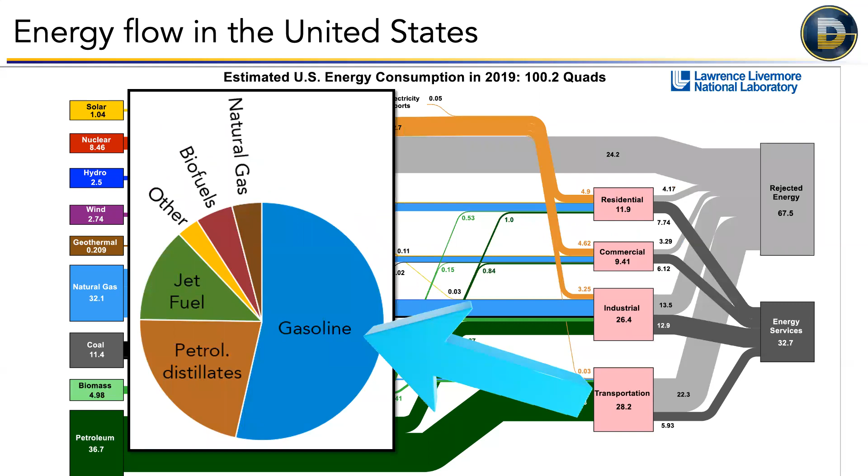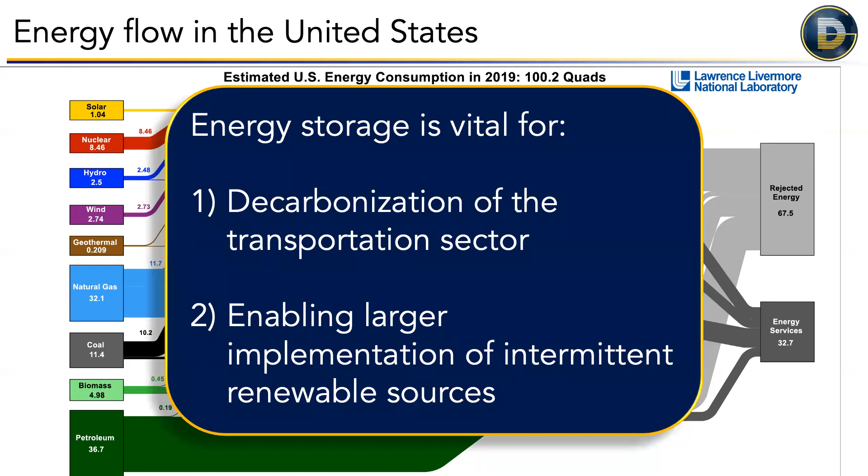Secondly, in addition to electricity, we have to replace the fuels we burn for transportation. We like gasoline and diesel fuel because they're very dense forms of energy that can be used on demand. So if we're going to replace that, we need something that is also energy dense and can be used on demand. So to wrap up, energy storage is really vital for two things as I see it: one, decarbonization of the transportation sector, and two, enabling widespread implementation of these intermittent renewable sources.

So what are our choices here? As I see it, we have three. One being hydrogen fuel cell electric vehicles, where we're basically doing a cold combustion process, combining hydrogen gas with oxygen gas to form water - so the emissions are great, just water and electricity. The second option would be battery electric vehicles, which will be the focus of most of this talk. The third option would be bio-derived fuels or biofuels, which would be the option of growing a plant or algae that uptakes CO2, processing it in some way to make a combustible fuel, and then burning it. That can be made quasi-carbon neutral because the CO2 emissions were uptaken at the beginning.

The problem is the current technology has a relatively low energy return on investment. The amount of energy you have to put in to cultivate the crops, harvest them, and process them is almost as much as you get at the end. So the return on investment is not that high.

There are alternatives out there that are better, but they're not ready for large scale yet. There's also land use implications with biofuels, notably that if we're using land to grow crops for energy, that's land that could be used to grow crops for food, which has social justice implications, and it could also drive deforestation. So in my opinion, while biofuels probably do have a role, they're better suited to applications that are more difficult to electrify via other options, such as aviation.

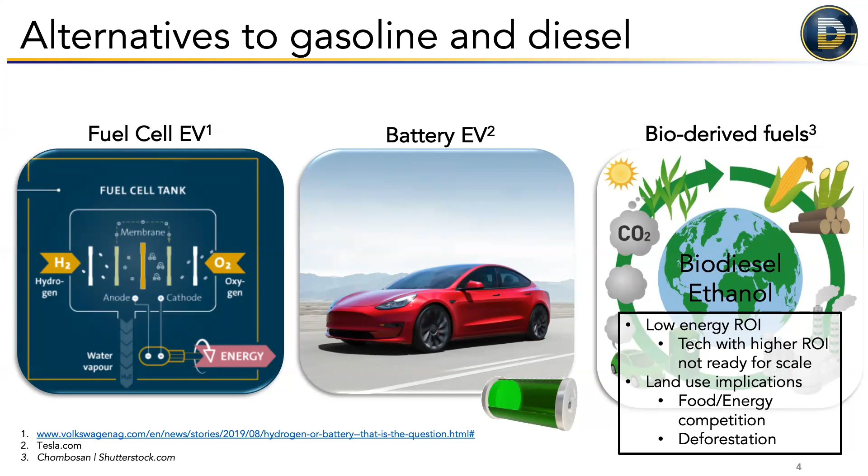So we're down to two options, battery electric or hydrogen fuel cells. Let's look at the energy flow for these two technologies. For battery electric, we have energy from the grid. We have to transport it and get it to where you charge a battery, which has some inherent losses - it might be around 80% efficient. The actual end use, charging and discharging the battery to drive an electric engine, is extremely efficient - it can be over 90% efficient. In contrast, an internal combustion engine might be only 20% efficient at the same process. So battery electrics have a big plus there.

In contrast, hydrogen fuel cells - hydrogen is not a fuel we can just go mine. You either use electricity to split water and make hydrogen, or use high temperatures to split hydrogen off methane, but that's not a low carbon option. So we'll assume you're starting with the same electricity, preferably from wind or solar, and you make the hydrogen with electrolysis, compress it, transport it, and then run your fuel cell to generate electricity. At the end you need a battery again because it's not practical to have a fuel cell big enough to accelerate a vehicle quickly. There's losses at every stage along the way, so the overall efficiency for a hydrogen fuel cell is only about 30%, maybe not even that high.

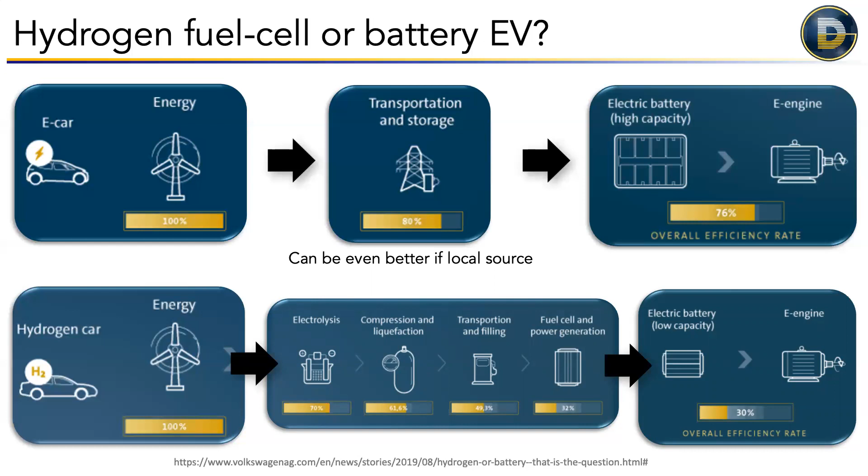What this means in the end is that if we wanted a hydrogen-based economy, we'd need more than twice as many wind and solar farms to supply the electricity, which really doesn't seem to make a lot of sense. For that reason, battery electric vehicles really are the most promising means to reduce the carbon intensity of the transportation sector, which is responsible for nearly 30% of overall greenhouse gas emissions in the world.

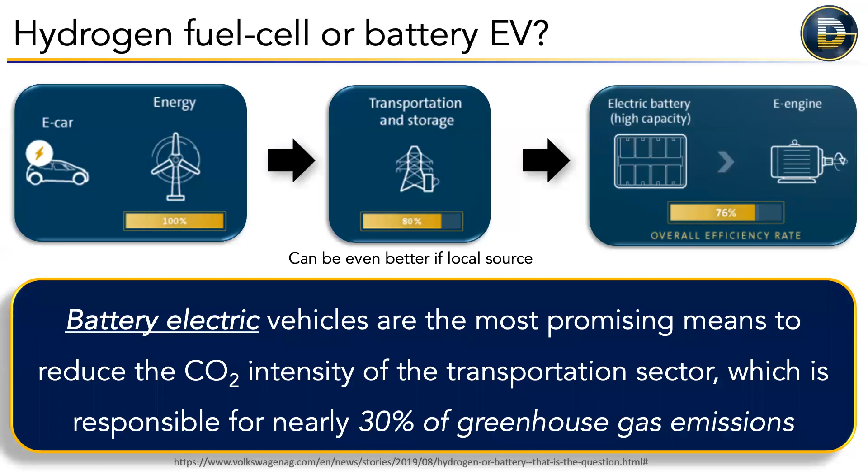Now, what about grid storage? I mentioned at the beginning there's two big things - transportation and enabling renewables on the grid - which aren't isolated, you need both. But for grid storage currently, we only have about 2% of the total generating capacity worldwide, and it's about the same in the United States. Above 95% of that storage capacity is pumped storage hydro - basically when you have surplus energy, you pump water up a hill, and when you need more energy than you're producing, you let the water flow back down and produce electricity from the standard hydroelectric pathway.

The problem with this is that it's geographically constrained. You have to have a body of water at the bottom and top of a relatively large hill, and it has to be close to a population center so you don't have to transport the energy too far. Because of this, we've saturated most of the good places to do this, and it's seen pretty limited growth in the last two decades plus.

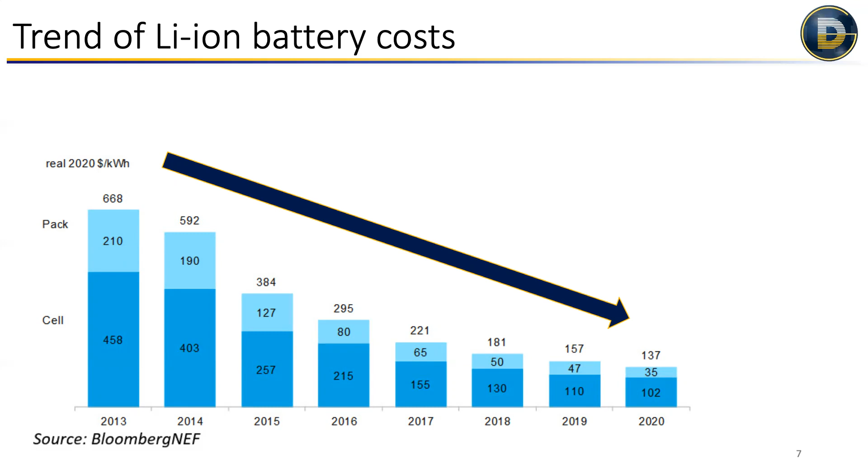There are other options for grid storage, but currently lithium-ion batteries are the leading option. Since they're also the leading option for electric vehicles, and EVs dominate the demand, they will dictate the progress in technology and the cost coming down. So they're coupled together. Beyond that, old technologies no longer good enough for EVs will become the low-cost option for grid storage, and batteries can have a second life.

For an electric vehicle application, you might call your battery not good enough anymore if you can only drive 80% as far as when the car was new. But for grid storage applications, if you can buy the battery for half the cost, that still makes sense, and you can more carefully control the charging and discharging rate. So these things go together, and that's why I'm going to spend most of the rest of the time talking just about electric vehicles, since they're coupled.

So I hope so far I've convinced you why we care about batteries. Does anyone have any questions?

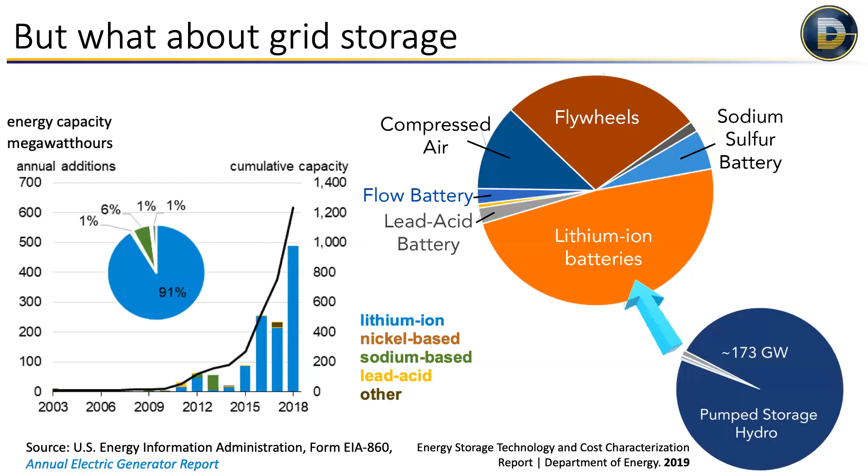Eric: I'm just curious, you mentioned pumped hydro - there are other gravity-based solutions. I've seen things using train tracks and lifting weights, using mine shafts and lifting elevator type systems. Have you looked into whether those have gotten much traction? Speaker: So those would fall into mechanical-based storage, or like you said, gravity.

There definitely are - flywheels are a related technology. That's basically where you get a very heavy disc and spin it really fast in a vacuum so there's low friction. You use magnets to levitate it like a maglev train.

Each has its own role to play because they have different properties. Pumped storage hydro has been the dominant one because it's really cheap if you have the right place to do it, and you can discharge for a very long time if you have a very large reservoir. Whereas lithium-ion batteries, at least now, are more economically viable for short discharge times - used more for load leveling, frequency regulation, rather than filling in the whole trough of a nighttime lull in production.

I don't know the specifics of what breakdown in the last couple years those gravity methods have had, but I do know lithium-ion and other types of batteries - I shouldn't neglect that there are some really exciting new flow battery systems where you can decouple the energy and power requirements, and they can be made very low cost because you don't care about how much it weighs. So there are lots of other options, but in the past few years lithium-ion batteries, because of the economics, have really started to dominate this space.

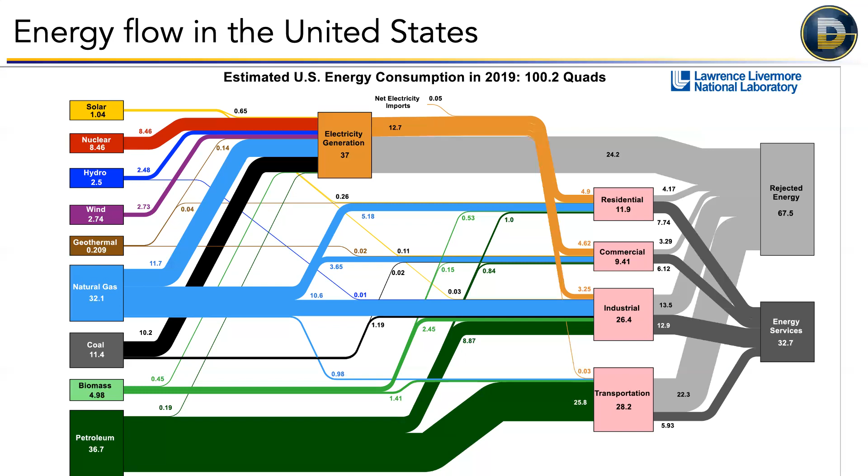Does that answer the question? Yep, thanks. Not a problem.

Any other comments before I dive into more technology stuff - how things work as far as batteries, ways to make them better, and the outlook moving forward? So next we're going to talk about the working principles of lithium-ion batteries, recent progress and outlook for lithium-ion, and then go beyond lithium-ion, looking at some next generation technologies and where that's going to take us.

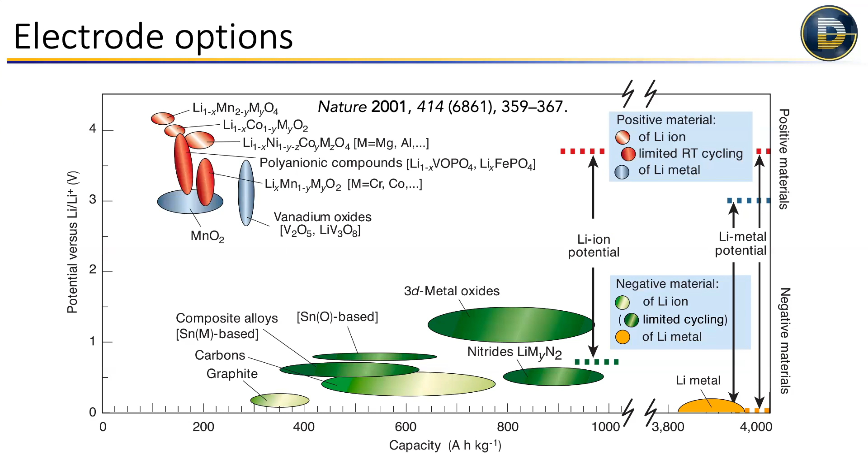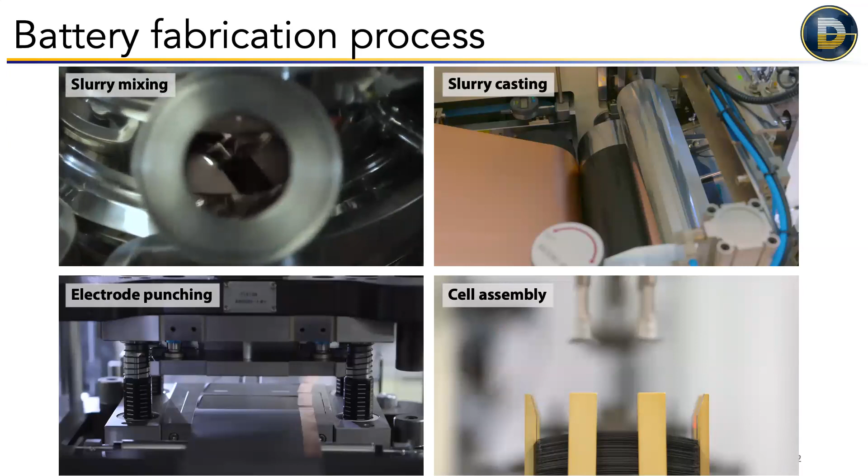So once we've selected these materials, we grind it up into a small powder, and then we mix it in what is basically just a giant KitchenAid mixer here. You can see that gray stuff in there is the slurry. And then essentially we paint that onto a very thin metal foil. The electrode is about as thick as a strand of human hair, give or take.

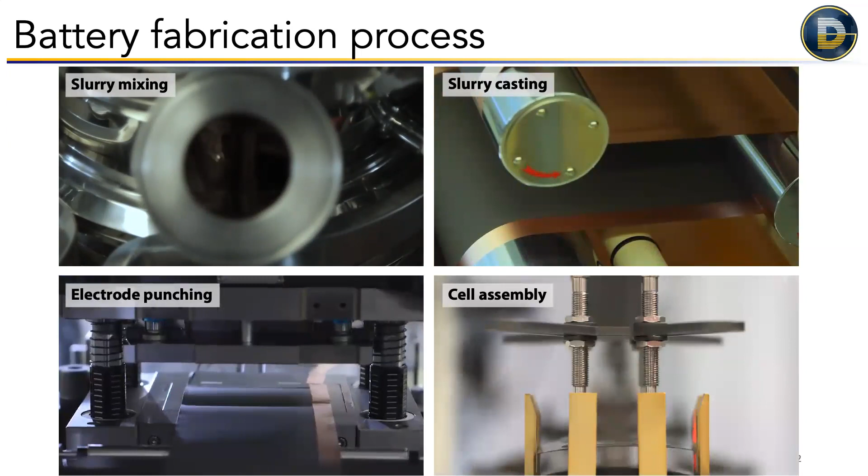And then we cut out individual electrodes from that large foil, and stack those electrodes, anode, cathode, with separator in between so that the electrodes don't touch. And then you put a liquid electrolyte in there, seal it up, and you're good to go.

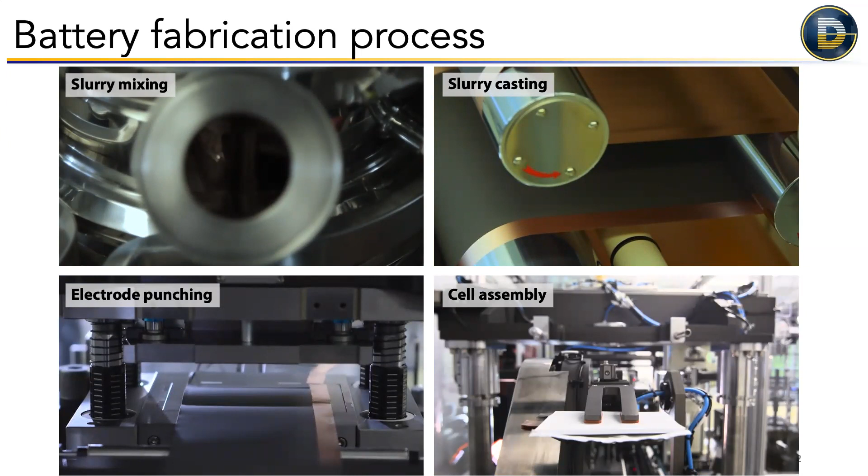But if you look at the stack, it looks something like this, where you can see the metal foils here. You have an aluminum foil on the positive electrode side, a copper foil on the negative electrode side, and then a polymer separator that spaces them out. This is porous like a sponge, so the liquid electrolyte that fills all of the pore space in this whole structure can permeate through the separator and into the electrodes. Then when you connect your light bulb or whatever you're going to power to these current collectors, you have a voltage and you can do useful work.

If you have a cell that's a cylinder, like it kind of looks like a AA, this is the form factor that, say, Tesla uses. Then rather than these flat sheets, you have a jelly roll basically wound into a spiral, but the same basic structure as this, just kind of wound up.

Any questions about that?

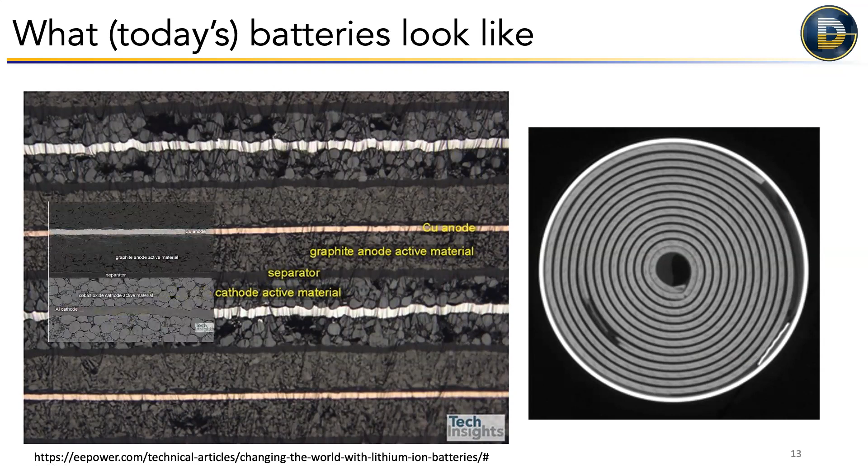All right, if not, this is just a closer look. You can really see how these electrodes are made up of little tiny particles on the order of maybe 10 microns, 10 micrometers. That is very small, and that allows the electrolyte to get in there so the ions can get in.

So essentially we have graphite and then some mixed metal oxide on the positive electrode. And that has gotten us to where we are now, which is a volumetric energy density somewhere 300 to 650 watt hours per liter, gravimetric 200 to 260 watt hours per kilogram.

The reason, or one of the biggest reasons we really like lithium ion beyond the energy density, is the fact that it can be cycled extremely efficiently. And this isn't energy efficiency, this is Coulombic efficiency. So if you send 10,000 lithium ions from one side of the battery to the other, you can get 9,999 of them back in most cases, which means you can cycle them back and forth well over 1,000 times, sometimes up to 5,000 times.

So if you put that into context, if you have a battery electric vehicle that has a 300-mile range, and you cycle that 1,000 times, that's a 300,000 mile life of the vehicle. If you cycle it 5,000 times, you're getting ridiculous numbers of miles. So the battery would last well longer than the car would at that point in most cases.

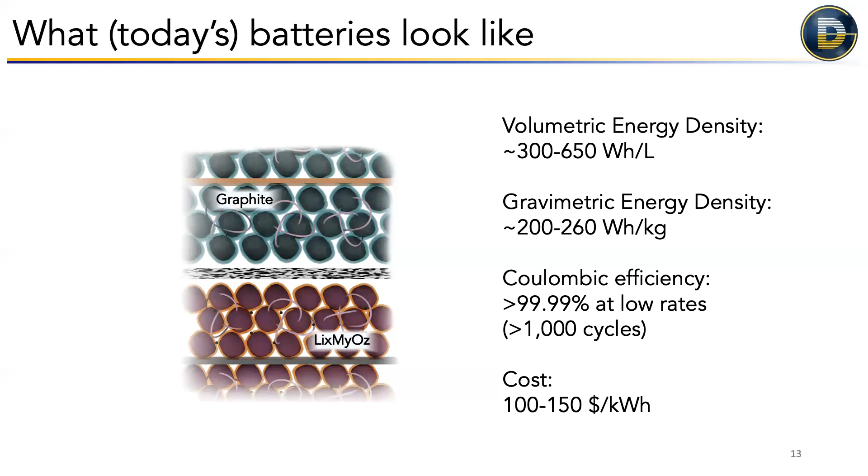So how can we make this better? What does a better battery mean? We all kind of know this instinctively because we use batteries every day in our laptops and phones. But what do we want?

We want to be able to charge it really quickly because, even if it's a phone, if your phone's about to die, you need to plug it in and get it back up so you can use it the rest of the day. Or if it's an electric vehicle and you're on a long trip, you don't want to have to stop for 4 hours in order to drive another 100 miles. You want to stop for 10 or 15 minutes, grab some coffee, get a burger, whatever, and then be back on the road and able to drive another couple hundred miles, preferably.

And we want our battery powered vehicle also to be able to drive a long way and not be like 50% battery in the back seat with no leg room or anything like that. So we need our batteries to store a lot of energy in a small space so that we can have a long range vehicle. We don't want them to catch on fire spontaneously, or if you get in an accident, or if you charge it wrong.

We want it to be inherently safe and stable. We want to be able to use it whether it's minus 20 degrees outside or 120 degrees outside. We don't want to have to worry about that.

We want it to last an extremely large number of cycles or be able to sit on the shelf. We don't want to park our car in the parking lot when we're on a trip around the world or something and come back and the car's dead because it's been sitting there too long. That's not acceptable. And we don't want it to cost an arm and a leg, right?

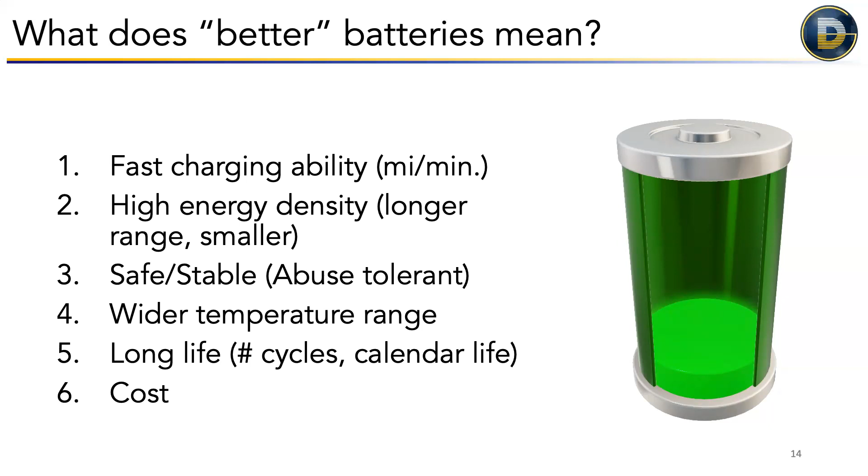So what limits fast charging performance in lithium-ion batteries? Well, it turns out that it's mostly related to the anode, the graphite.

And to explain what happens during fast charging, I need to take a step back and explain what happens during the charging period. So when we put graphite, which is a layered material—that's what these little lines represent—into the electrolyte, that's what these lithium ions with the red things represent, and we start putting lithium ions into the graphite.

The first few lithium ions are like, oh this is cool, there's plenty of room. And then it starts to get crowded. And when that happens, the energy level of this electrode raises up, which is good because that's storing energy—if we're putting things into a higher energy level, they're going to drop a long way and we'll be able to do a lot of work.

But materials are not just stable at any energy level. At a certain point, if the electrolyte has unoccupied states that electrons can go into, that will happen. So then the electrons, instead of recombining with the lithium inside the graphite, will actually reduce the electrolyte itself. It will react, consuming the electrolyte and forming a reaction layer on the surface.

Actually, it turns out this is the only reason why lithium-ion batteries work at all. If this didn't happen, if it didn't form a passivating shell that protected the graphite from further reaction, you wouldn't even be able to discharge the battery once, let alone 10,000 times.

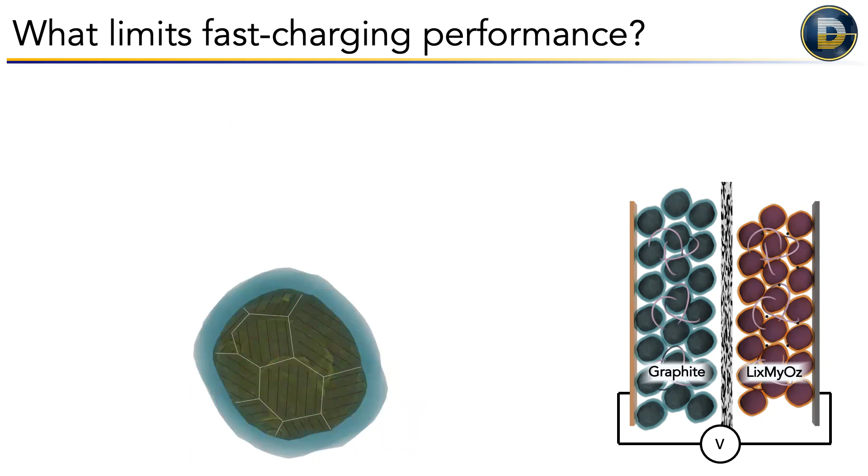So we're left with this structure: the graphite in the middle, and then what we call the SEI, a solid electrolyte interphase, on the outside. This is the magic that makes a lithium-ion battery work. And it was a serendipitous discovery. It wasn't designed this way, it just worked, which is really remarkable.

But if we try to charge this too fast, essentially we can't put the lithium ions in fast enough, so they stack up and form a concentration gradient across this porous structure. You have more lithium ions at the surface of the graphite than deep inside.

So when you're charging your battery quickly, you're preferentially charging the surface of the graphite, and eventually the lithium ions stack up, the surface gets totally full and crowded. Rather than just sit around, the lithium ions actually plate out as metallic lithium and form what's called a dendrite on the surface of the graphite. But now this is no longer protected by that passivation shell, so it continues to grow, forming more SEI on top of the lithium metal, which again consumes liquid electrolyte, and you only have a finite amount.

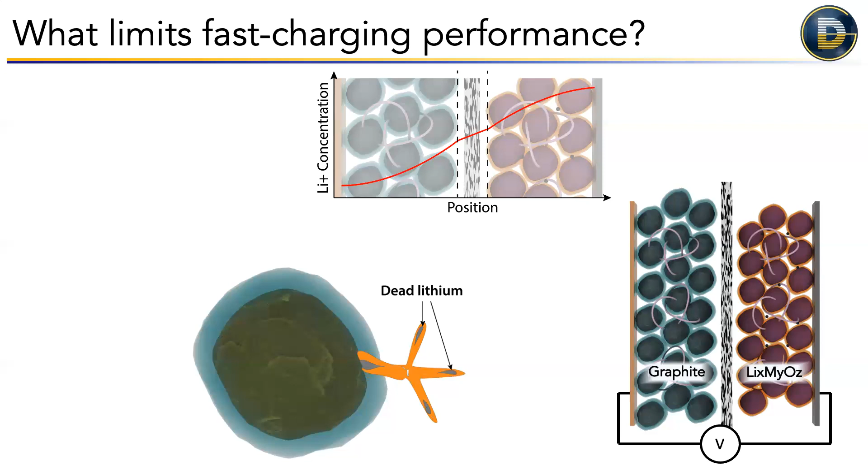And because lithium metal is so reactive, we can't actually strip all of it back when we discharge our battery. So you get these isolated little pockets of lithium that we call dead lithium, and that's directly reducing the capacity of your battery. This is trying to charge a state-of-the-art high energy density battery in 15 minutes, from almost 0 to 90% state of charge.

The capacity of the battery fades very quickly. We often use 80% retention as a failure mechanism. Here it only lasted 12 cycles, because you built up this thick layer of dead lithium on the surface that you can't get back, and it blocks further charging.

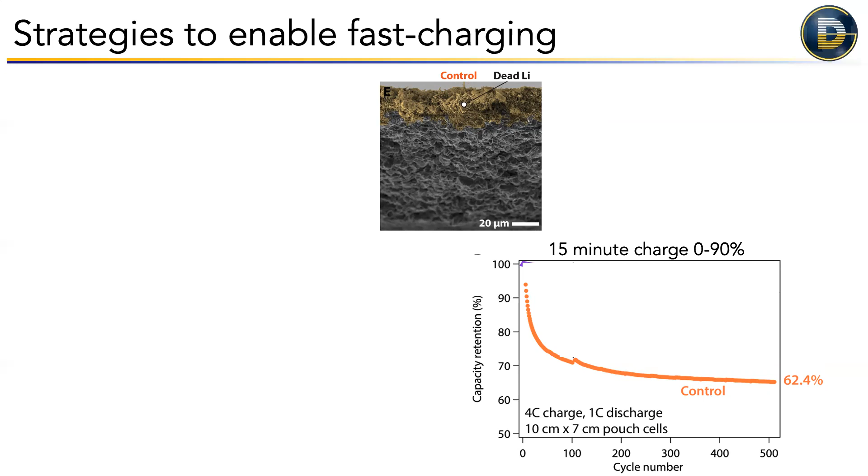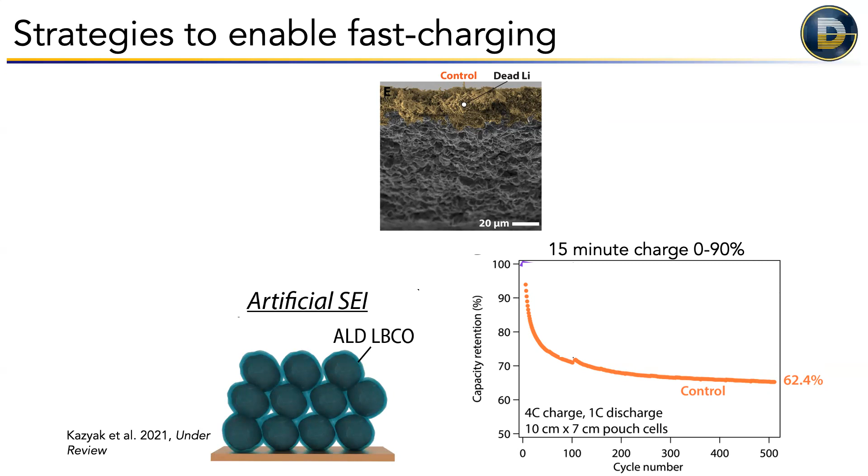So this is one of a couple slides where I'm going to show something my group did. I have a manuscript under review right now where we developed an artificial SEI, that interphase shell. We deposited a coating there rather than letting it happen naturally, and our engineered version performs much better.

As a result, we can charge our batteries quickly without them fading. Rather than 12 cycles, our battery lasted to 80% for more than 500 cycles. Another approach we developed last year is basically using a laser to cut holes to allow the lithium ions to get deeper into the electrode, and that works even better. We can even go to a 15-minute charge and still have 90% capacity after 500 cycles.

This is really a game changer for electric vehicles because it alleviates range anxiety. Rather than this thick layer of dead lithium, there's just a little bit sprinkled here and almost nothing on what we call this highly ordered laser patterned electrode, or HOLE electrode. That's a shout out to our group's work in this space.

There are other approaches as well, but I really think fast charging is a problem that we, as a community, are pretty close to overcoming in these electric vehicle style batteries.

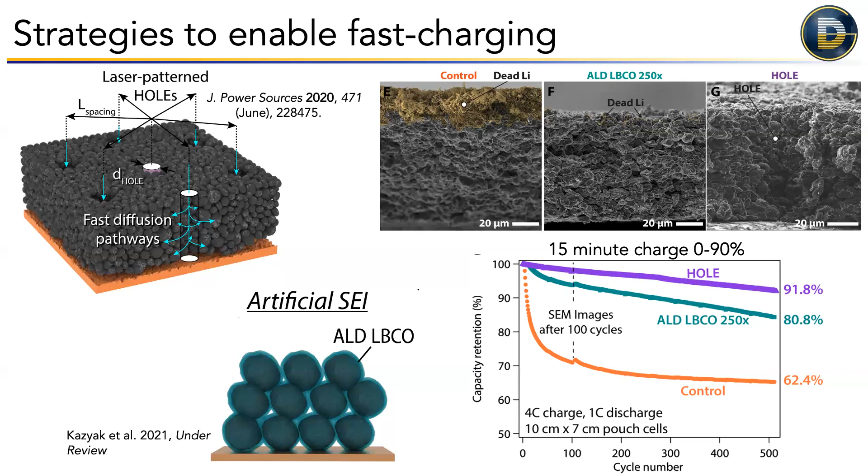There's still a lot of work being done on lithium-ion batteries, whether it's changing to different cathodes. The big push is to move away from cobalt-based batteries, because Congo produces almost 20 times more cobalt than any other country, over 70% of the world's cobalt. This has a lot of social implications, so we're really trying to move away from it. In the past 5 to 10 years, we've gone from a 1-to-1-to-1 ratio of cobalt in the most common cathode, called NMC, to now 8-to-1-to-1, dramatically reducing the amount of cobalt, which is really good.

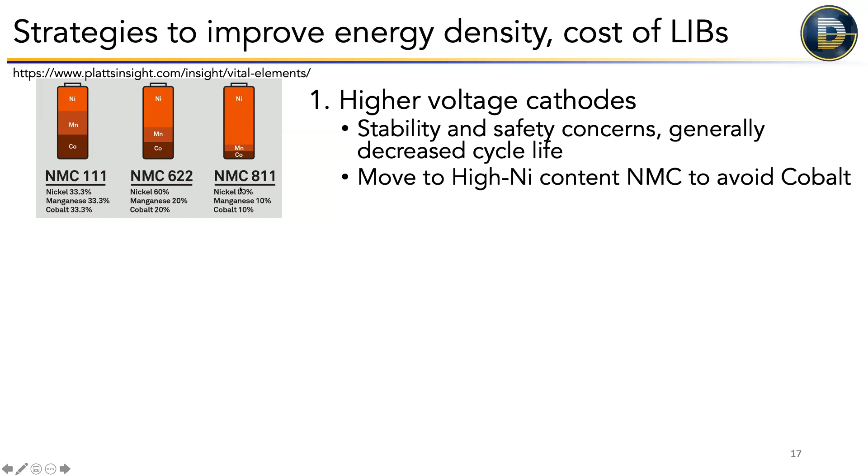Now we're trying to mix silicon into the graphite, because you can put a lot more lithium into silicon. The problem is when you put in so much, it expands and then pulverizes itself—it can't withstand the expansion. But that's definitely something that's happening right now.

You can also do things at the system level, like go thicker electrodes and thinner everything else, so that all your mass and space is the stuff where you're actually storing energy. But that leads to poor rate performance, because lithium ions can't get through that really thick electrode. A lot of the other things, like the separator, are already pretty optimized, and if you try to go further, you risk safety concerns. The Samsung Galaxy Note fires were caused, in part, because they pushed the thickness of the separator down to only 4 microns, whereas the state of the art is more like 8 or 9—half that thickness caused problems.

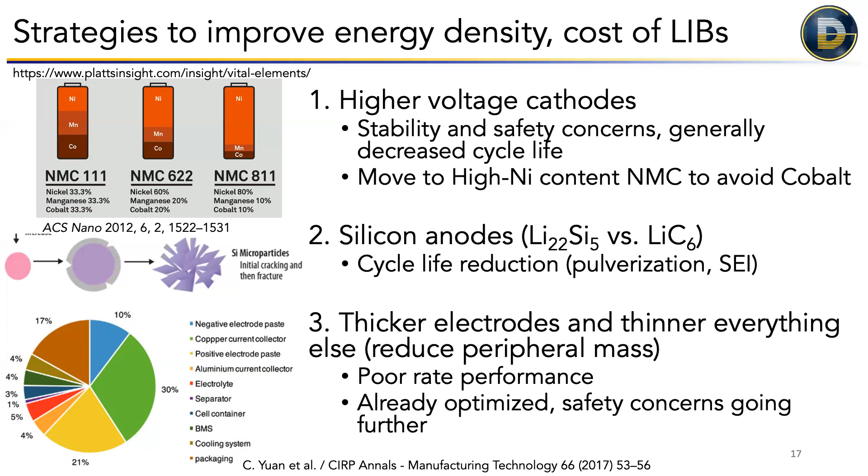So this is kind of where we're at. The Tesla Model 3 is around 250 watt hours per kilogram, depending where you look. The Chevy Bolt is just a little behind that, because the Bolt uses NMC and Tesla uses NCA. NCA has a little higher capacity but has some stability issues, so Tesla's making a choice there. By mixing in some silicon, we can increase the energy density pretty substantially, but there's not really a pathway to push lithium-ion beyond 300 watt hours per kilogram, or at least not much beyond.

But here we're trying to plate lithium metal uniformly, and again, you can't get it all back. It's low efficiency, and what that does is it kills your battery in a very short number of cycles, just 50 cycles or even less. Your capacity is going to drop to basically nothing. And if one of those dendrites happens to penetrate across that 10 micron thick separator, very, very thin, then you could get a short circuit and have some really big safety concerns.

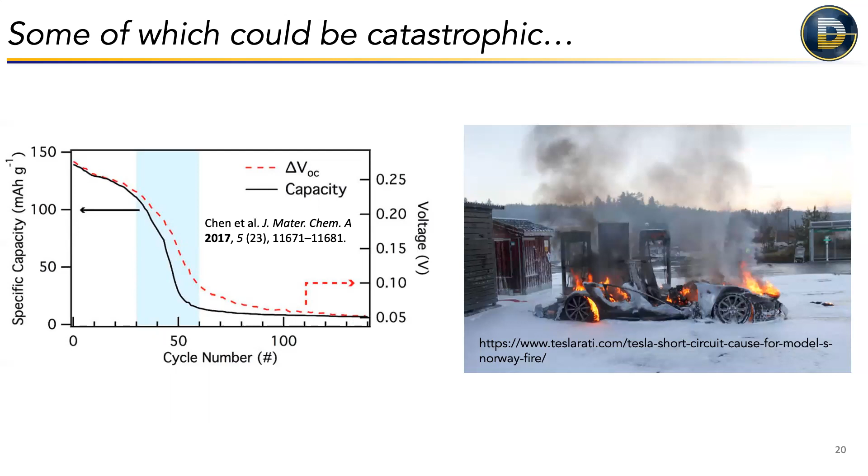But what if we could replace that liquid electrolyte and that porous separator with a solid material that was non-flammable? This would be great, right? But that solid material would have to do everything that the liquid does and the porous separator does, namely conducting lithium ions very, very quickly, not allowing electrons to go through, and physically blocking the two electrodes from touching each other, all while being safe and stable for thousands of cycles.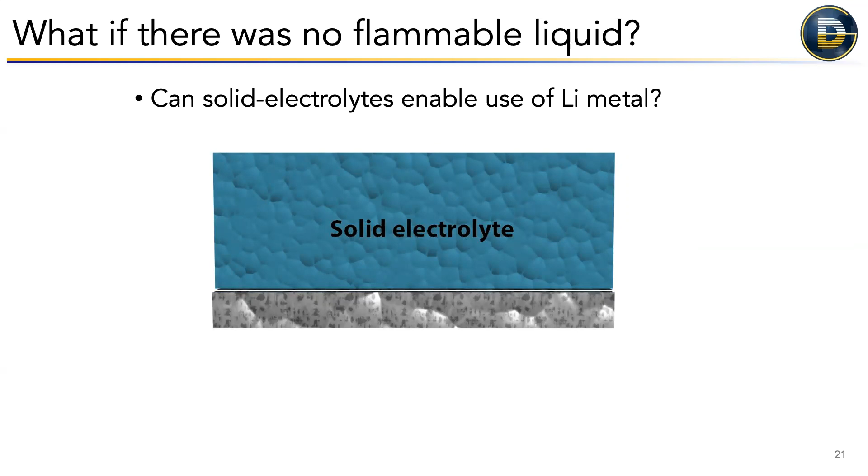But if we can use solid electrolytes to enable the safe use of lithium metal, there's a really big upside, because maybe that solid electrolyte could make the lithium metal plate out uniformly, and then you can strip it back and cycle it safely. That would give us dramatic improvements in safety, cycle life, and a big one, energy density, as well as some pack level benefits, because there's a lot of weight and space and cost used to control the temperature of lithium-ion batteries.

Because if they get too hot, you get thermal runaway and they catch on fire and blow up, basically. But if we don't have that possibility, because the electrolyte is now safe inherently, you don't need all that thermal management and packaging stuff, and you can make a big improvement.

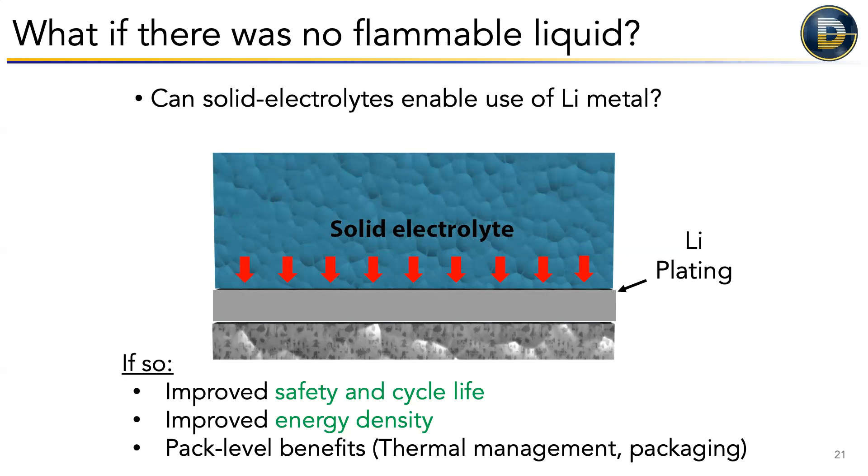So this sounds like pie in the sky stuff, but actually last year, Samsung put out this really foundational paper in the solid state battery field that proved you can make a pretty large solid state battery that has significantly better energy density than even Tesla's best. This is prototype scale, very frontier stuff. And they could cycle it almost 1,000 times with very little fade in capacity. And this is with a lithium metal electrode. So indeed, these solid state lithium metal batteries can have very long life.

And just for context again, we'd be talking over 200,000 miles of life for an EV if it had a 300-mile range, roughly for 800 cycles. So this is a big deal.

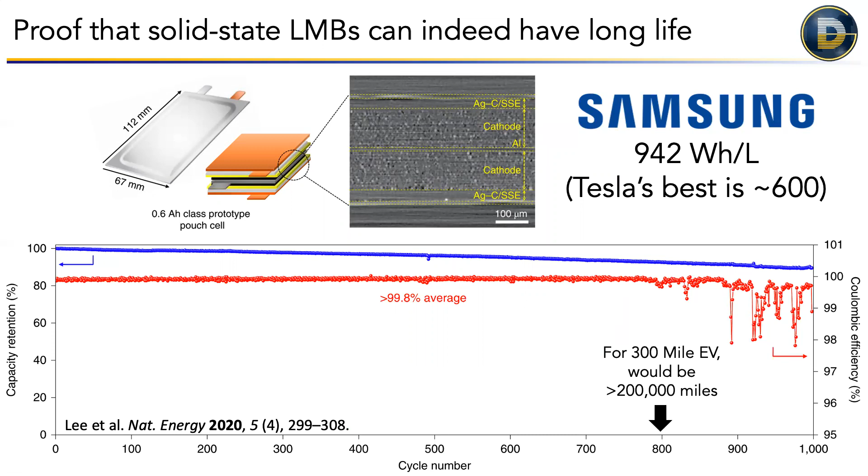But will this actually happen? Can solid-state lithium metal batteries displace lithium-ion? Because we've seen how much lithium-ion batteries have come down in cost. They're gaining a ton of momentum. So how could it actually displace lithium-ion batteries? Well, there has to be a big benefit of solid-state batteries, namely really high energy density. And this isn't just like a 5% or 10% improvement. It needs to be a step change, so 25, 30, 50% higher energy density to motivate this shift.

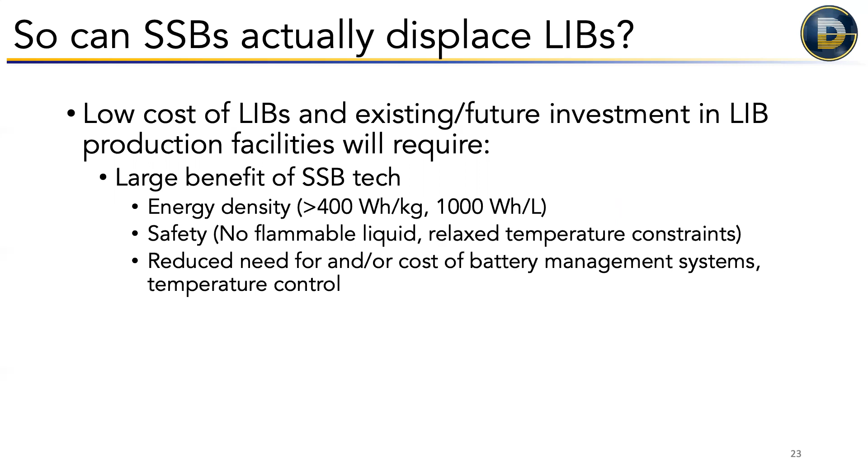The safety is a big one. If we don't have flammable liquid in there, it's a game changer. You don't have to worry about it, even if you're in a collision and the battery's opened, it can be very safe. Reduced need for management systems, I talked about that. We can't sacrifice on cycle life. We still need that multiple 100,000-mile range.

The difficult ones, and I have these in red because they're definitely still works in progress: we need to be able to charge them comparatively at least as fast as lithium-ion batteries, preferably faster. And then we also need to make them at least competitively priced to lithium-ion batteries, which will involve establishing supply chain and a lot of things. And preferably, we would enable the use of existing production lines for lithium-ion batteries for these solid-state batteries, because even in the last decade, there's been a huge investment by all kinds of people and companies in these production facilities, so they're not easily going to just abandon them.

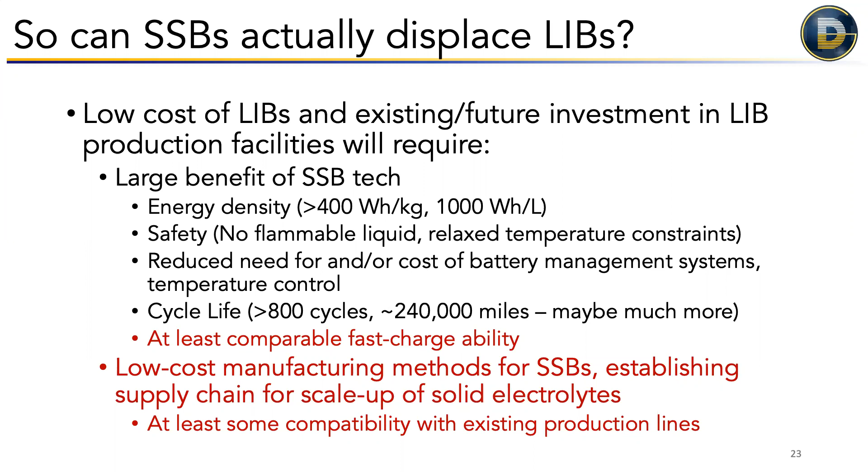So where are we at in terms of these requirements? We might be able to get there, but we need to study the materials and understand them better. We need to know how they behave in an actual battery during fast charging, fast discharging, low temperatures. There's a lot of variables here. And then there's a lot of work that needs to be done in manufacturability. So in the interest of time, I'll just keep going.

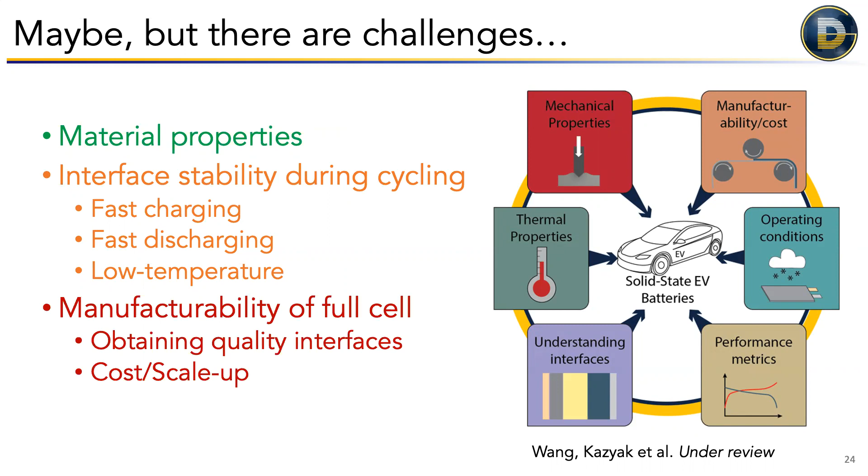The solid state battery community has developed a large number of different candidate materials for the solid state electrolyte over the past 10 years, and each has their own strengths and weaknesses. None is really strong in every area.

You have the sulfide materials here, which have very good conductivity, meaning the lithium ions can move back and forth very well, but they're not stable in air and they're not stable against lithium metal, which is a problem, but it's easy to process them.

In contrast, you have these garnets, which are an oxide material. They are stable against lithium, they have a wide electrochemical stability window, and they're air stable, but the conductivity isn't quite as high and they're not processable.

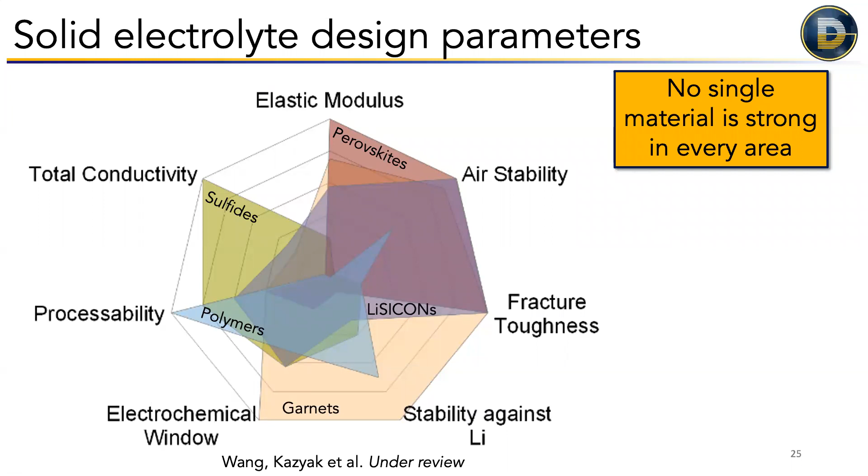So the game really becomes, well, which of these doesn't have an Achilles heel that can't be overcome? It's interesting because if we look at the commercial space, each company seems to be picking a different horse in this race. The Samsung paper I just showed you uses a sulfide material called argyrodite.

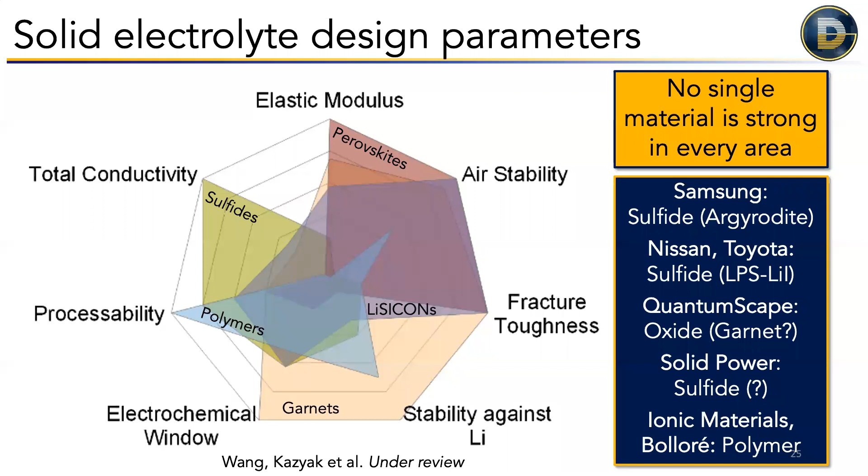Nissan and Toyota are using a different sulfide material. A startup company called QuantumScape, which if you've watched the stock market recently has really blown up and been very volatile, uses an oxide material that I think is one of these garnets. It's a bit hard to tell, but from the patent literature, it seems to be a garnet material. Another startup company is using a sulfide, and then you have several companies betting on polymer electrolytes because they're cheaper to manufacture. So we've come a long way.

We've now developed ways to make these dense, thin film solid state electrolytes. We can make these small pouch cell type things, but I'll jump ahead here. The question really isn't, can we make 10 or 100 cells? It's, can we make 10 or 100 million of them that all work and are all safe? That's a big question still.

One thing that helps is when we're using lithium metal, actually all of the lithium can in theory come from the cathode rather than the anode, which means you don't need to handle lithium metal when you manufacture the battery. You can make the cell without an anode and then just plate out a lithium metal anode on the current collector. This removes a third of the manufacturing cost straight away because you don't have to manufacture an anode. Plus you don't have to work with lithium metal, which is very reactive, not stable in air, all kinds of problems.

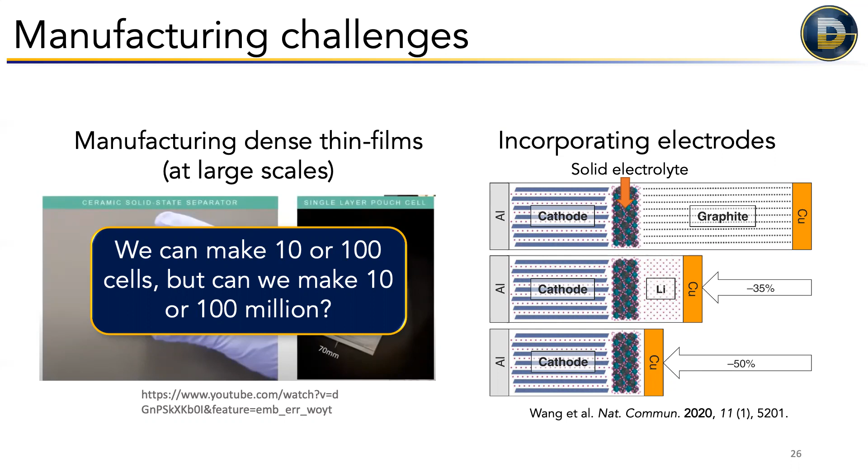So there's other challenges. It turns out that solid electrolytes don't just inherently solve the dendrite problem. You can still get these lithium growths that penetrate into solid electrolytes because there are defects and things. This is where making 10 or 100 million becomes hard, because if one in every 10,000 has a defect, you might get a short circuit.

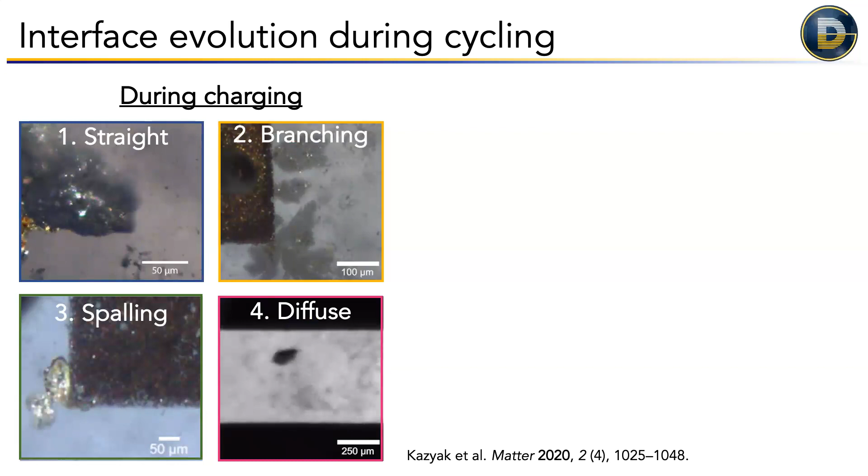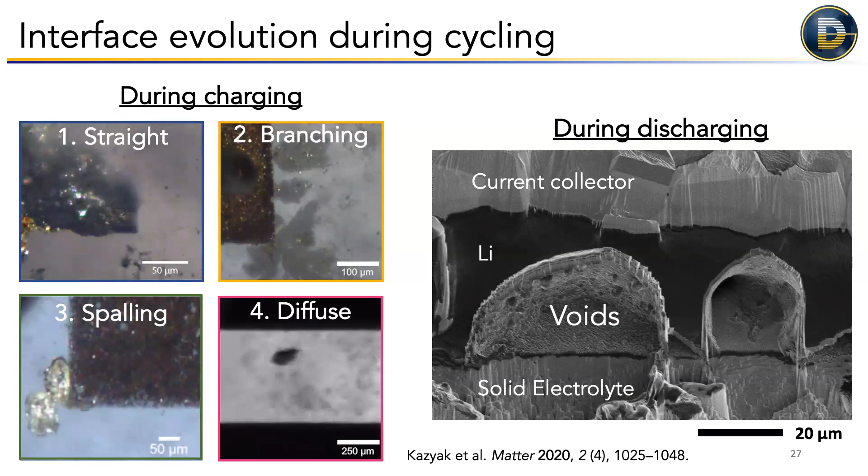Now, because it's a solid state battery, it's not going to catch on fire, but it will kill the battery, so it's not good. Also during fast discharge, you might not strip the lithium uniformly, so you can get these voids, which cause issues as well. But despite these challenges, it really looks like this is the direction that

electric vehicles are going to go in the not so distant future. So these are the top 5 automotive companies in the world, all of which are investing heavily in electric vehicles. Volkswagen has a very large solid state battery effort, says they're going to invest $86 billion by 2028 and have 70 full EV models by 2028 as well.

Toyota, not quite as much money, although it's harder to find stuff. They say they're going to have at least 60 partial or full EVs by 2025, including at least one consumer model that has a solid state battery. They're going to debut a solid state battery powered vehicle at the Olympics this year.

Daimler as well, huge investment, both consumer and they're big in commercial vehicles as well. Ford, not as big in the EV, they're kind of hedging their bets and sticking with a more diverse portfolio, but GM has a huge investment and also says they're going to stop producing internal combustion engines by 2035, which really tells you that these big companies believe electric vehicles are the future.

And Tesla, obviously is all electric, but they have not really shown interest in solid state. They think lithium-ion batteries are cheap enough that they're going to be the way to go for a long time.

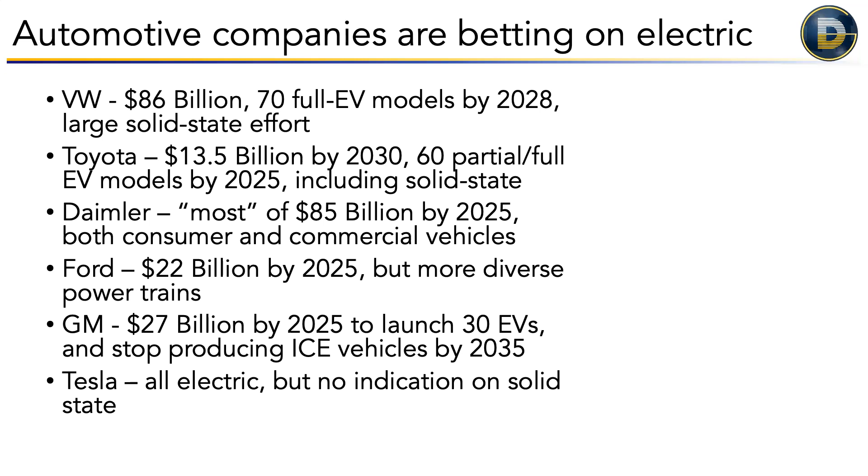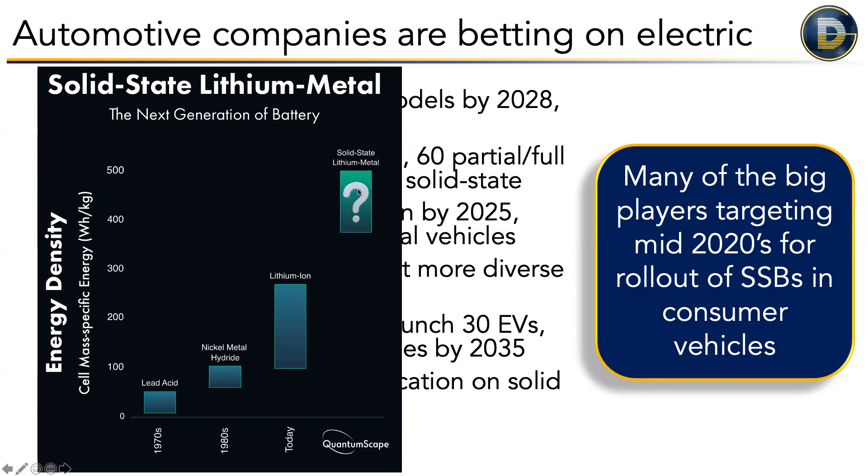So many of these companies have now come out and said mid-2020s is really the time where they think it's going to switch from lithium-ion batteries to solid state, because of this potential increase from 250 watt hours per kilogram up to 450 would be a huge game changer. Just in the past couple of months, there's been some really promising stuff from a couple of startup companies.

Volkswagen has invested $300 million in QuantumScape in the past few years. Just on December 8th, QuantumScape released their first battery data and showed that this solid state battery, in a small pouch cell, can charge in less than 15 minutes at 30 degrees C, approximately room temperature. Whereas even a Tesla needs 40 minutes or so to get 80% charge. So this is a big deal.

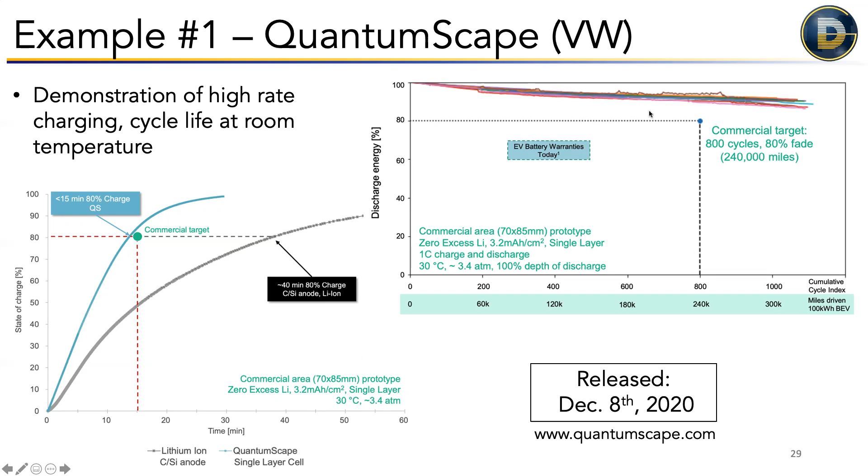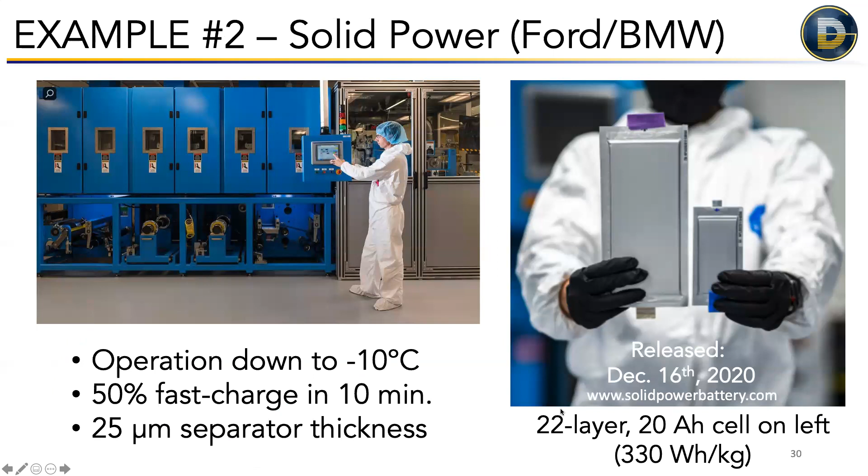They also showed that they can cycle 800 times with a 1 hour charge and discharge, not the fast charge, but 1 hour charge and discharge, and still have well over 80% of the capacity. This was a really promising release, and in response to that, another startup company sponsored by Ford and BMW put out a release about a week later, showing they had much bigger pouch cells that could be charged relatively quickly and can operate down to minus 10 C, et cetera.

So I hope that I've convinced you that lithium-ion batteries are a really good option for both grid storage and EVs, and they're going to continue to get better and cheaper for at least the next few years, especially with a little bit higher energy density. I think fast charging is coming, and that the future of EVs is really bright. We're at the inflection point, about to see a really dramatic change in what vehicles people are buying.

I think in the next 5 years, it's going to shift from a majority not EVs to possibly even a majority EVs, because in the next few years, probably by 2023, they're going to be cheaper than an equivalent internal combustion engine. They'll be cheaper to maintain and operate, longer lasting, and more fun to drive.

But if we're going to do that, obviously we're using electricity, so that electricity has to come from renewable sources. It needs to be accompanied by an expansion of renewable electricity production and a decrease in other energy demands, which requires a lot of grid storage.

And finally, solid state batteries - this one's less certain, but it's looking positive - could be disruptive to the lithium ion market in the 5 to 10 year time frame, but there are still challenges. All right, that's all I have. Thank you for listening.